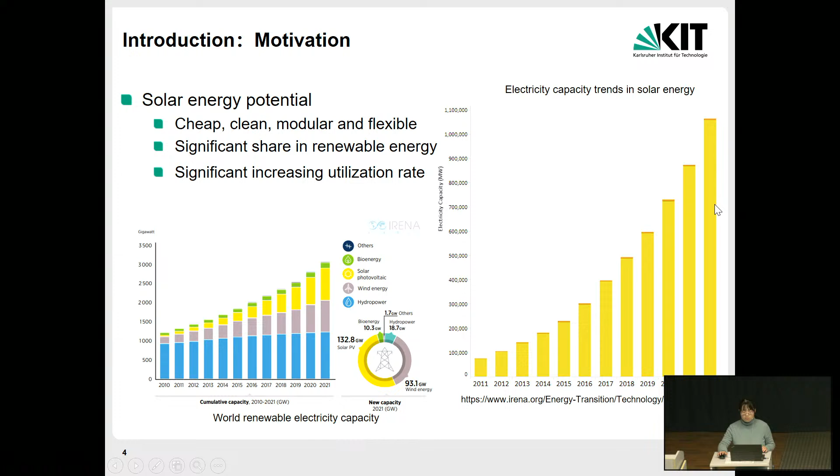It also shows a significant increasing utilization rate of solar energy. As you can see here, from 2011 to 2022, there is more than 10 times the electricity capacity in solar energy.

Regarding combined heating and power systems for domestic application, currently cogeneration, the combined heating and power system, has demonstrated higher efficiency than conventional coal power plants. As you can already tell from the name, it can produce heating and power at the same time. As you can see here, this is the cogeneration system, where the input is natural gas, and it can produce heating and power simultaneously.

Because this one, they will save some waste heat or utilize the waste heat for cooling. So the efficiency would be very high, about around 87%, with very small energy loss.

But compared with the conventional heat and power supply, we just have power or energy generation from coal-fired plants. But many of the energy from these coal plants will be wasted as waste heat, which is not utilized anymore. So the efficiency of these coal-fired plants is very low.

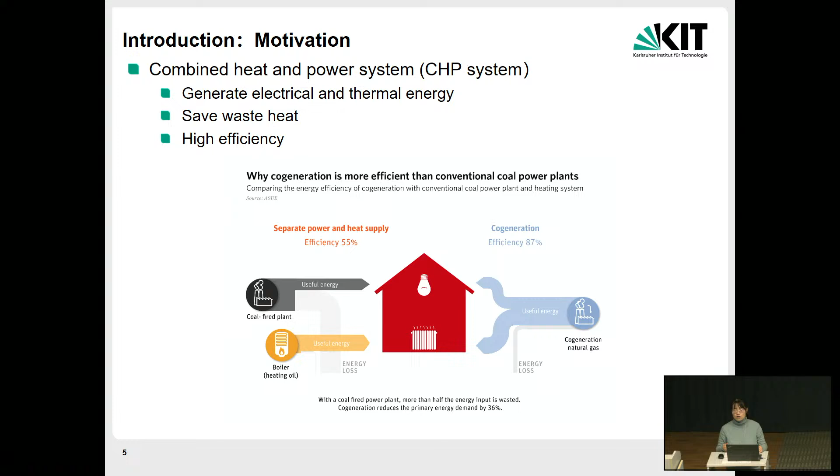The objective of this presentation: first we will establish a very general solar CHP system. Then we will use this system to analyze domestic application in 26 European countries. After we get the result, we are going to do cross comparison from the techno-economic analysis. Finally, from this result, we will determine the future strategy for solar systems.

Here is a very brief introduction of the whole work. The subjects are 26 European countries and 3 solar systems, including PV system, PV thermal system which we call PVT, and also solar thermal system which we call ST. The indicators we are going to investigate are from tech, economic, and environment analysis, and the tools we are going to develop are a MATLAB model to compare this assessment.

And first, I will start with an introduction of these three kinds of solar systems. Okay, so first is the PV system. Currently there are three types of PV system connections with or without grid. One is grid direct.

So one is the grid direct. For this one, the grid will make up for the shortage, and also when there is excess power generation from the PV, it will export to the grid. This can also earn some money, it can be sold to the grid. So in our investigation, we are focused on this grid direct system.

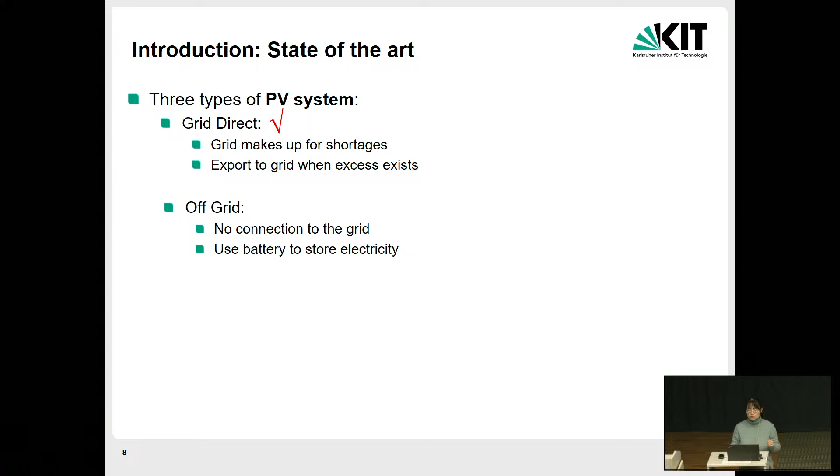Another connection is off-grid, so there's totally no connection to the grid, and in these cases we are going to use batteries to store electricity. The third one, the very smart and also novel one, is the grid hybrid. Here you can see we have the battery as a backup, and then we have the grid, and we can switch on and switch off to connect with or without this grid.

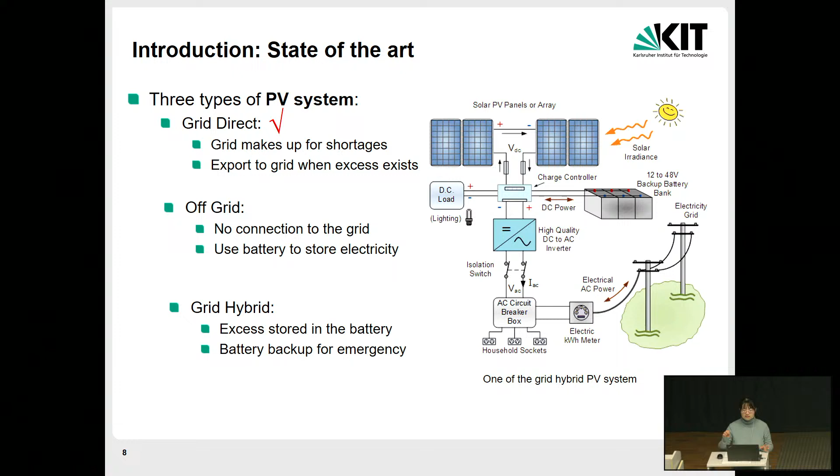This one is very smart, so we can avoid very high energy demand, and then we can use the batteries to charge the system. But also if there's excess energy produced by PV, it can be also stored in the battery. So this is very flexible and very smart, and can adapt to the high prices of the electricity demand.

So if we use a very large area of PV, this amount of reduction of electricity power would be a lot. So there will be one good solution: we can add an additional cooling system to utilize and give away this heat. So on one side this waste heat will be utilized, and the temperature of the PV will be decreased. This is the concept of the PVT.

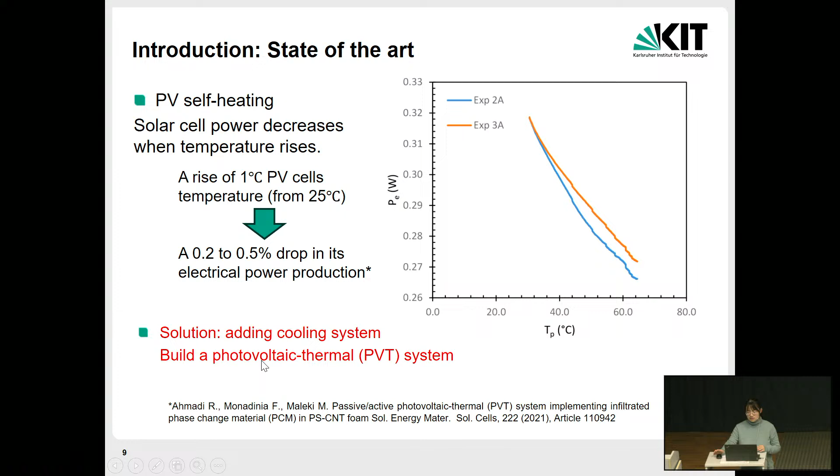We call it photovoltaic-thermal system, PVT. So this is the PV panel, which is just the normal PV panel, and below this PV panel we add some loops, called the cooling loops. For this one, we can take the heat generated from the PV out for heating demand. So this is the utilization of waste heat.

At the same time, the temperature of the PV will be decreased because this waste heat has been taken out, so the efficiency of the PV will increase. For this PVT system, it will produce both electricity and heating.

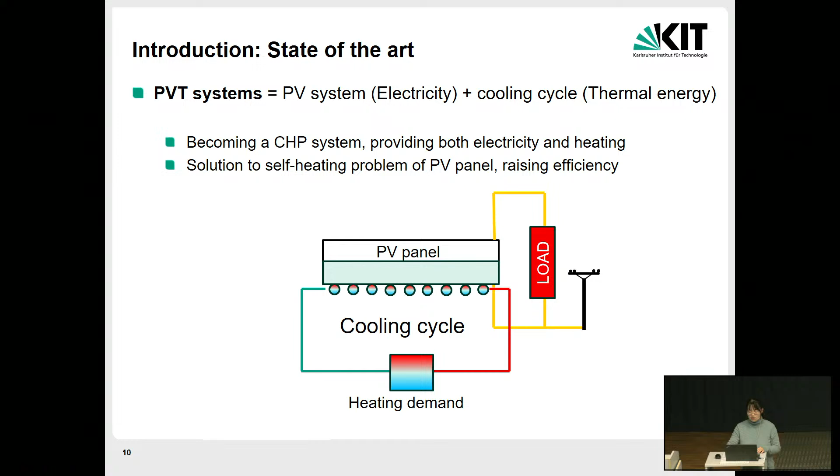The electricity is produced by PV, and the heating will be provided by this cooling cycle. So this is the second solar system we're going to explore. And the third system, maybe most of you already know, is a solar thermal system.

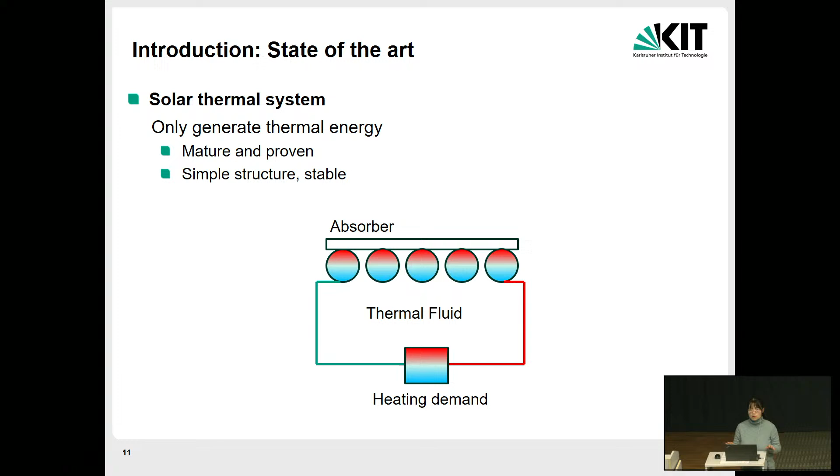It's a very mature and very well established technology. Here we have the absorber and also some tubes, and in each tube we have the thermal fluid to give some heat transfer. The thermal energy generated by solar will go to meet the heating demand of the domestic application. The advantage of this technology is its very simple structure, very stable, and very well developed and mature technology.

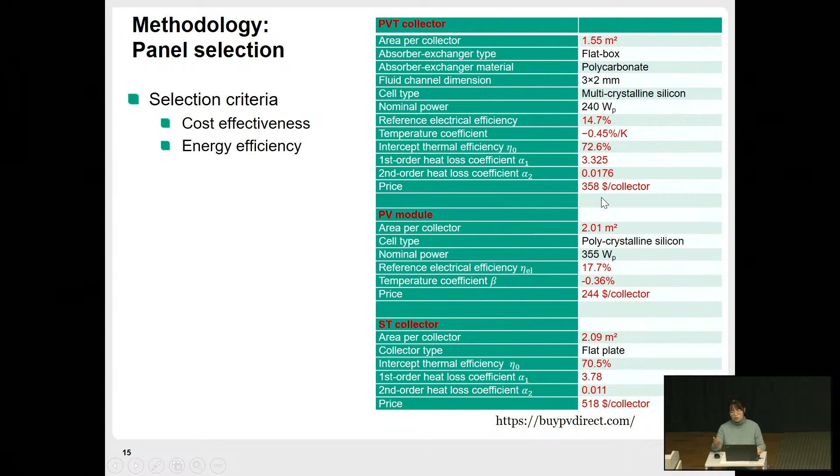Next, this is the water storage tank. So we have some energy balance equations here. This equation shows how much power is generated and how much energy changes in the thermal tank.

We have 4 resources. One is the thermal energy given or generated from the coil, which is connected to the solar panel. We also have losses because of heat loss to the environment, and we need to use some of the heat to meet the hot water demand, and some of the heat to meet the space heating demand.

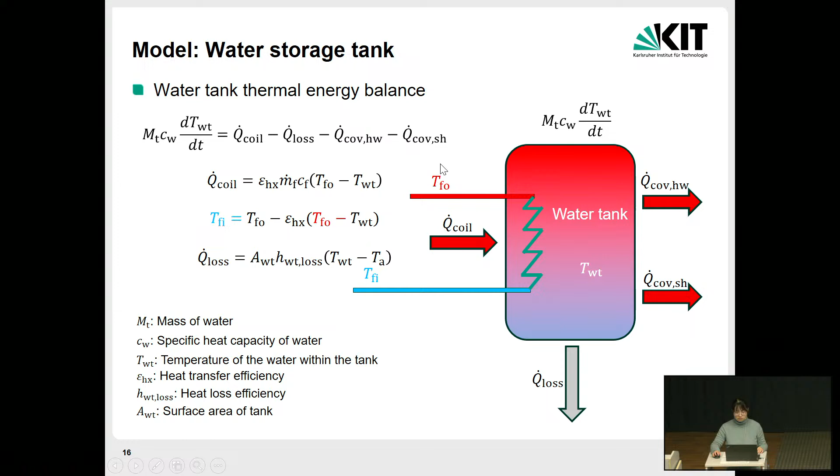So this is the equation of this water tank, and for the thermal demand balance, we also need to think about the current hot water demand. This needs to be judged by the temperature of the tank.

If the temperature of the tank is larger than the required hot water demand, all of the required demand from hot water can be recovered from this water tank. But if this water tank temperature is smaller than the main water supply, none of this will be covered by the water tank. And if the temperature is in between, there will be a linear, proportional relationship between these two parameters.

And this is also the same with the space heating demand. How much of the space heating will be covered from the water tank will depend on the temperature of the water tank.

If the temperature of the water tank is larger than the space heating demand temperature—in most cases, for the thermostat application this is 70 Celsius—if the hot water tank is larger than 70 Celsius, all of the required space heating demand can be covered. But if it's smaller than the outlet of the radiator, it's 0. And if it's between, there will also be proportional equations.

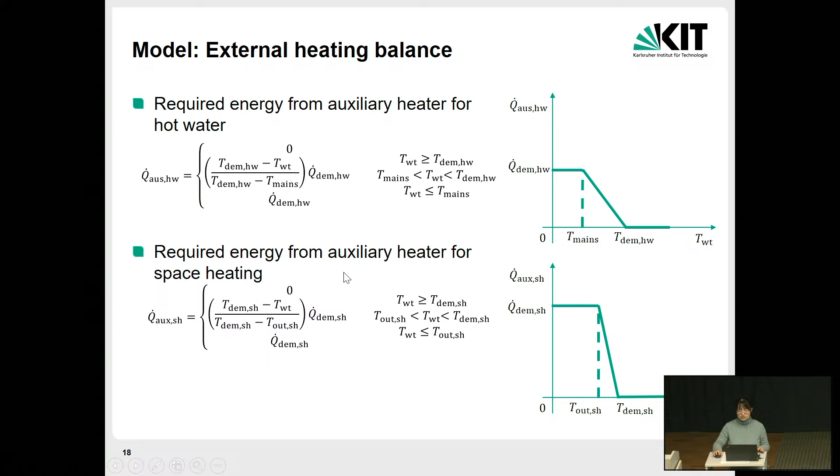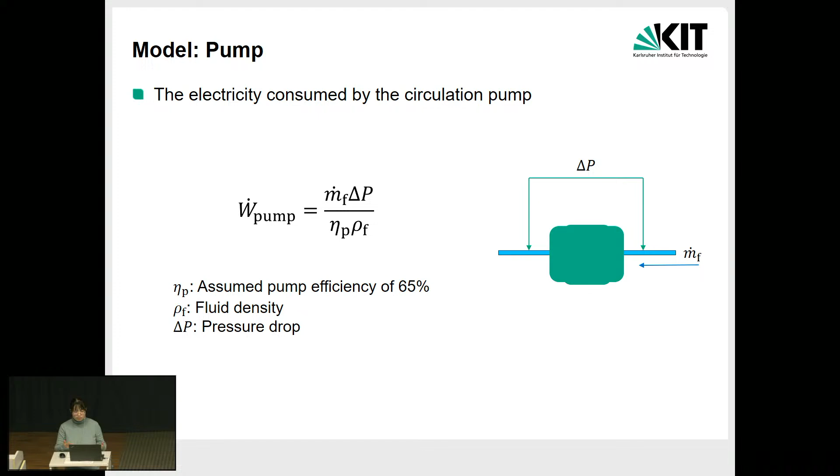And here this is also the required energy from the auxiliary heater—this is for hot water, and this is for space heating. And we also have the pump, the electricity consumed by the pump from this equation.

This is because in this model we calculate annually, conducting this calculation for 1 year, which is around 8,760 or 8,784 hours. So there's a lot of data, but we calculated this from 1 hour to 1 hour. So here I present 1 hour cycle so you can understand it better.

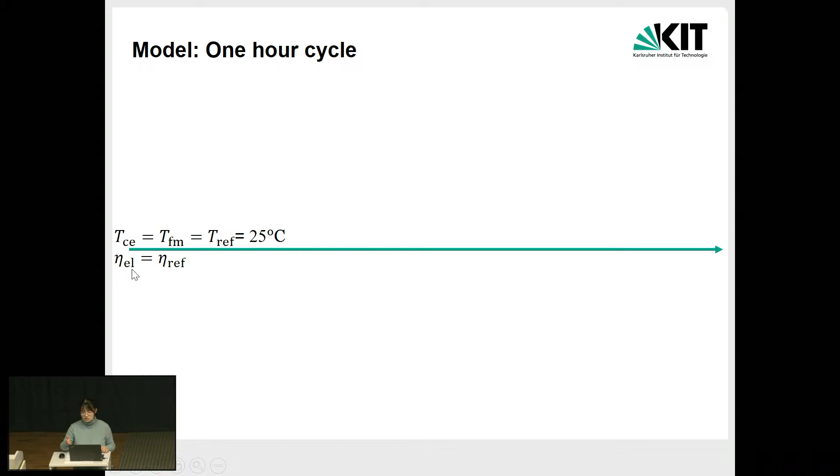So here at the first point, this is the cell temperature and the efficiency of the solar cell. We just use the reference temperature and reference efficiency. When the sunlight comes in during this 1 hour, the temperature of the cells increases and the electricity efficiency decreases. Then from the solar irradiance in this 1 hour and this efficiency, we calculate the electricity generated.

This electricity is going to meet the electricity demand, so first we calculate this electricity part. Then after that, we can calculate the reduced temperature, and from this reduced temperature we can calculate the thermal efficiency of this system at this specific hour.

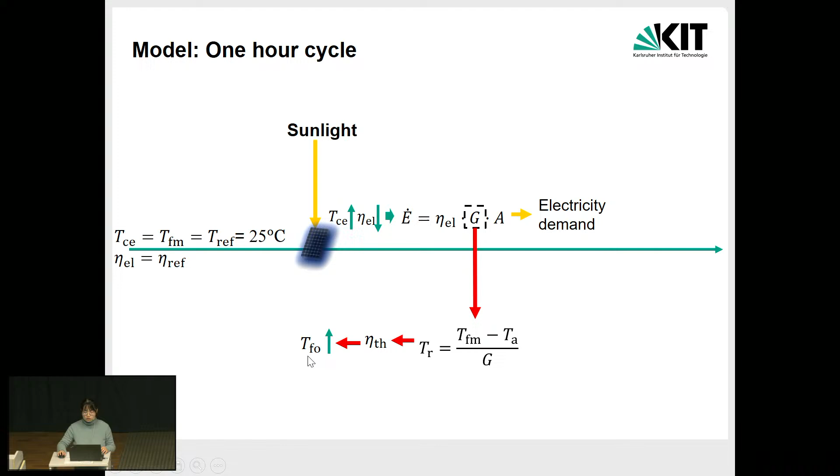And then we can calculate the output, the outlet fluid temperature. And after the coil, we can calculate the water tank temperature. And here, after we know this water tank temperature, we can define how much heating thermal energy we can recover, or we can cover from this solar system. And after that, we can calculate the fluid inlet of this panel, and then this one cycle is complete, and then we can calculate the next cycle.

So this is for one cycle, and then for each case, we have calculated more than 8,000 times, because the target is for 1 year long. So this is 1 hour.

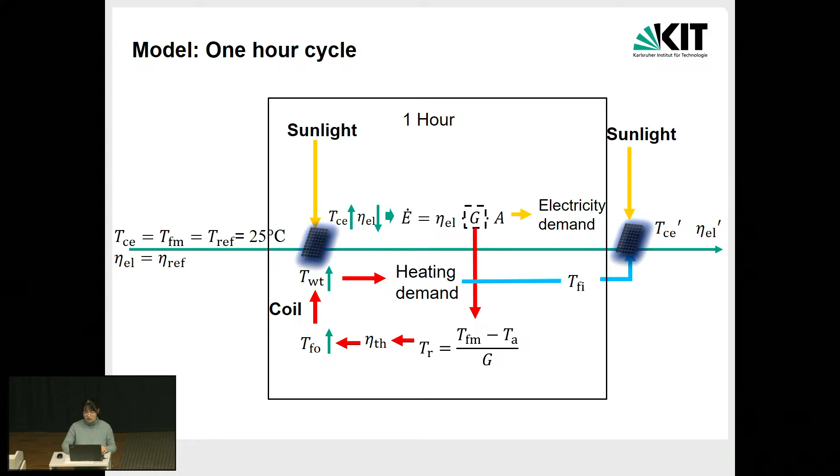And here, this is the model validation. We've validated the PVT panel. So this is the model simulation, and this is some experiment data. This experiment data we get from the company, the product company. And the deviations are okay, it's quite fine, around 5%.

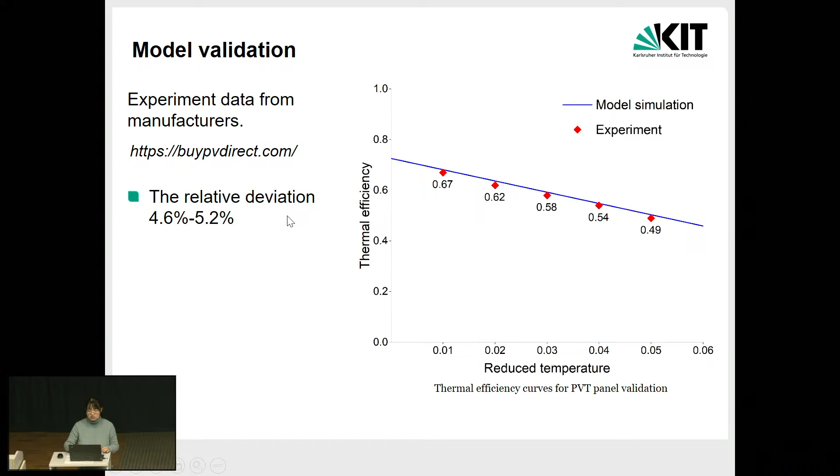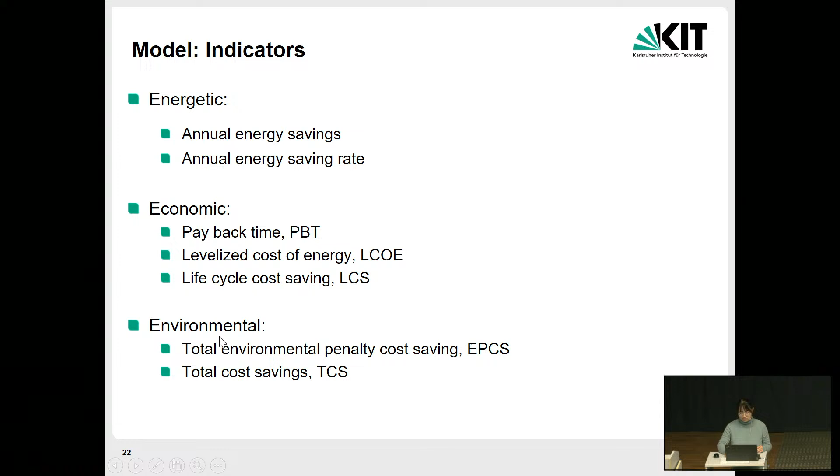So we investigate annual energy saving, meaning how much energy we can save from this if we use this solar energy. And another one is the annual energy coverage ratio.

This means the ratio of how much energy we are saving to how much demand we need for the domestic application. So if this ratio is 100%, all of the required demand for this domestic application can be met. But if it is 0, which is the extreme limit, none of the energy will be covered from this solar energy. So this is also very important for us to understand how much energy can be covered from this solar panel, to show the potential of the energy coverage performance.

And another indicator is the economic indicator. So one is the payback time. If this payback time is very small, then it is really good, because you don't need a very long time to earn some money.

And then the lifetime of the technologies is 25 years. So that means if the payback time is larger than 25 years, this investment is not good, so we don't need to buy this product.

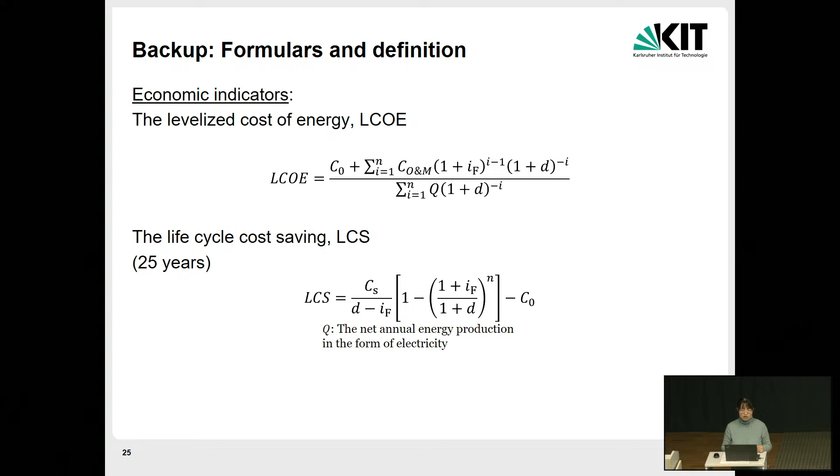Besides the economic indicators, we also think about the potential of this technology from an environmental perspective. Here we have the total environmental penalty cost saving. This means if we use this technology, how much CO2 emissions we will save, and these CO2 emissions will have a converted cost related only to the CO2 emission. We calculate how much CO2 we can save and how much money we can earn from this CO2 reduction.

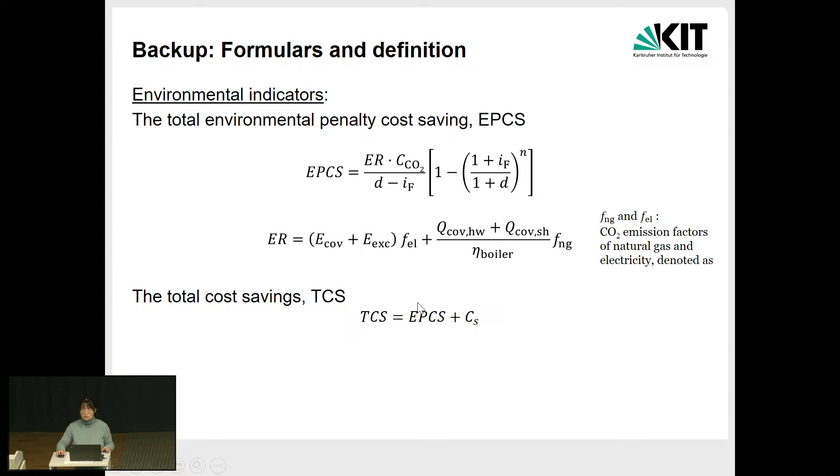Next, I will quickly go through the input parameters. Now that we've established very general models, for these 26 European countries we need to collect all the input data, because for each country the input data are quite different. First is the solar irradiance.

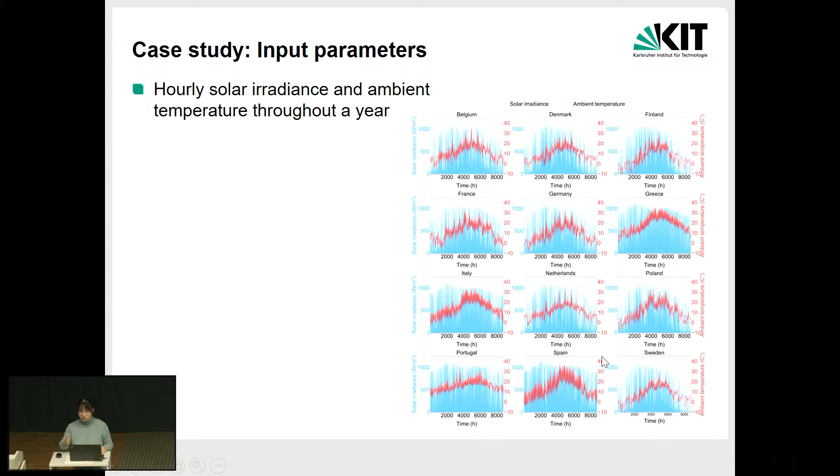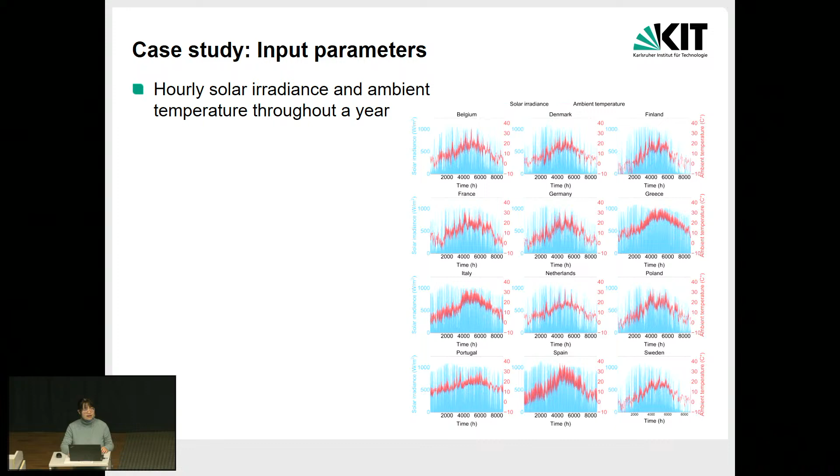This blue line is the hourly data of solar irradiance, and this red line is the hourly ambient temperature. Here I give the example of Germany, and this is the example of 12 countries showing the solar irradiance in the transient case. In our model, we have collected such figures for 26 countries.

The next parameter is the hourly electricity demand throughout the year, because we need to understand the electricity demand from domestic applications. Here is the annual electricity demand from each of the 26 countries, and here is the transient, hourly dependent electricity demand throughout the 1 year.

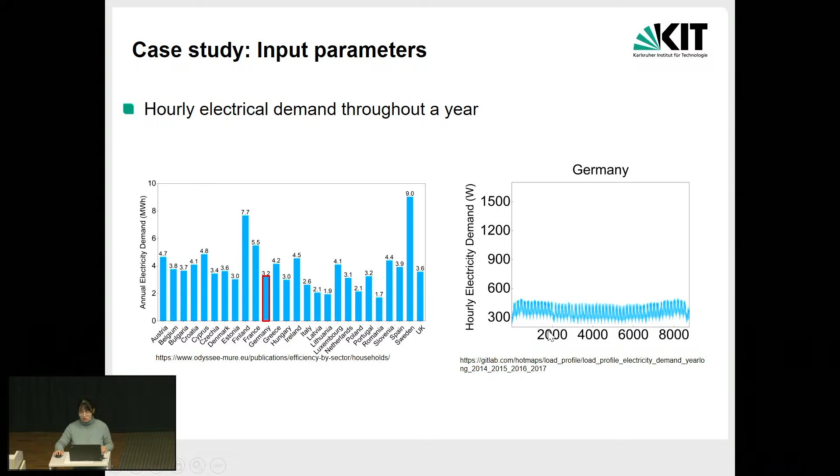This is also the example of Germany, and here we have examples of 12 countries. This is very interesting - you can see that Finland requires a lot of electricity demand, maybe because it's always dark there, or they need more electricity. Sweden also needs a lot of electricity. In Poland, since these y-axes are the same, you can see they need very little electricity demand compared with Finland and Sweden. Germany is also okay, not too much compared with Finland and Sweden. This is interesting to know the different electricity demand from these different countries.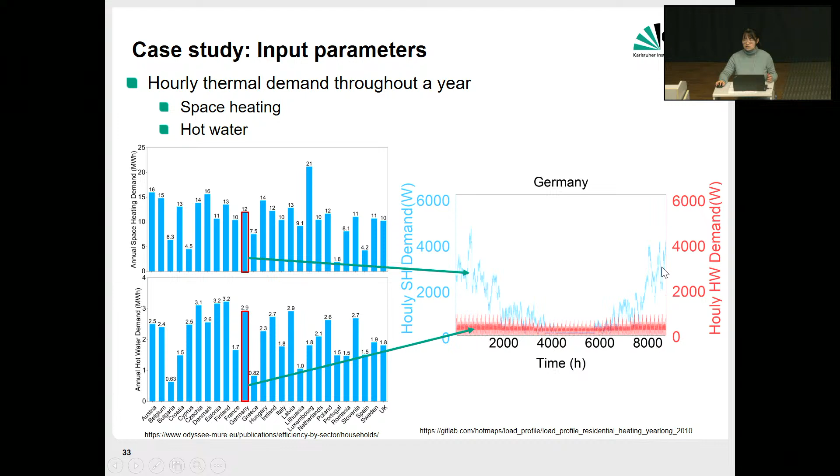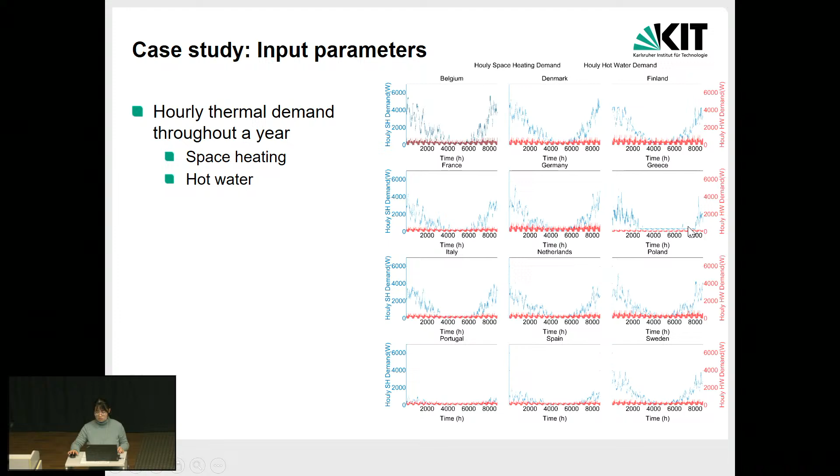And in Greece, as you can see here, the time that doesn't require space heating is very long—almost, I think, longer than 5 months. So this is the difference in thermal demand through the year.

And here we also think about some input parameters of roof areas, because we need to define how much solar panels we are going to install on the rooftop.

So we need to think about how much solar panel area we need for each country. We assume that the installation area of solar panels is fixed at half of the roof area. We have the average roof areas of each country, and then we take half of it for solar panel areas.

Another parameter we are thinking about is inflation rate and discount rate, because we need to think about the price after 25 years—how this money changes over these long times. So we need to think about inflation rate and discount rate.

So here we collect the data of inflation rate, and also discount rate. And we also need to think about energy price for each country—the electricity price of these 26 countries, and also natural gas price. One is for electricity, and another is for heating from burning natural gas.

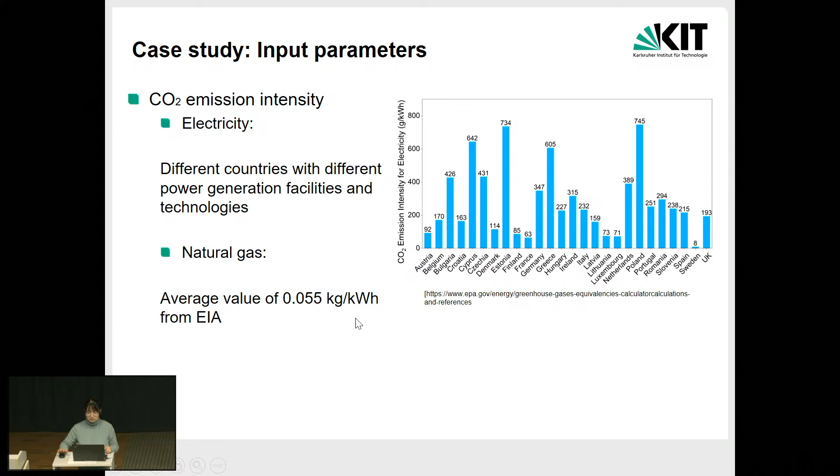Okay, so now we have the model, and we have all the input data verified from the 26 countries. Now we are going to put this data into the model and do the simulation, and then the cross comparison. So next we'll discuss the results.

Okay, so first is the transient operation of 3 typical countries. Because we now have results for 26 countries, there's a lot of data, so first we start with 3 countries which are very typical. We choose Sweden, Germany, and Spain as the 3 typical countries for comparison first.

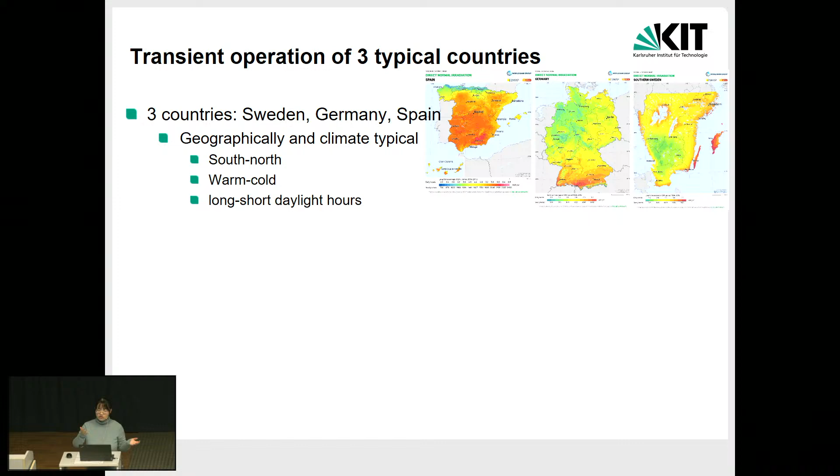The reason we chose these 3 countries is because first, they are distributed from south to north, from very warm climate to cold climate. Also, Sweden has very short daylight, and Spain has very long daylight, and these 3 countries are among the top 10 solar energy markets. So it's very interesting to investigate the potential of solar energy in these 3 countries.

And for comparison, we also choose 2 typical weeks: one is the week starting from January 1st, and the other is the week starting from July 1st. We want to understand the transient operation between these 2 typical weeks—one winter, one summer.

Okay, so first is the comparison of 2 typical weeks. Here we choose the PV panel, and we choose Germany, and here this is the result for the winter, and this is the result in the summer.

As you can see, this light gray is the demand required during this time, and this red one is how much electricity is excess from this solar panel. This dark one shows how much electricity can be covered from this system. In the winter, there's almost no excess because the demand cannot be met, there's no excess from the PV panel since solar irradiance is very low.

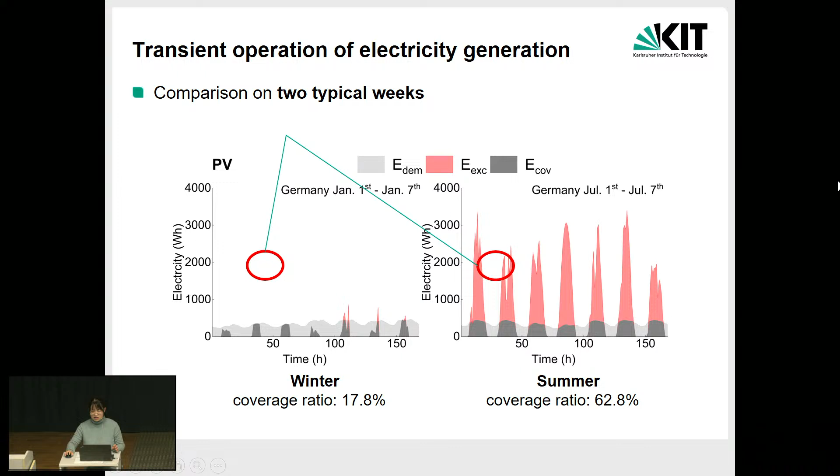electricity than PVT. Then we compared three typical countries: here we have cases in Spain, cases in Germany, and cases in Sweden. We chose a winter week for the comparison, and the solar panel we chose is a PVT panel.

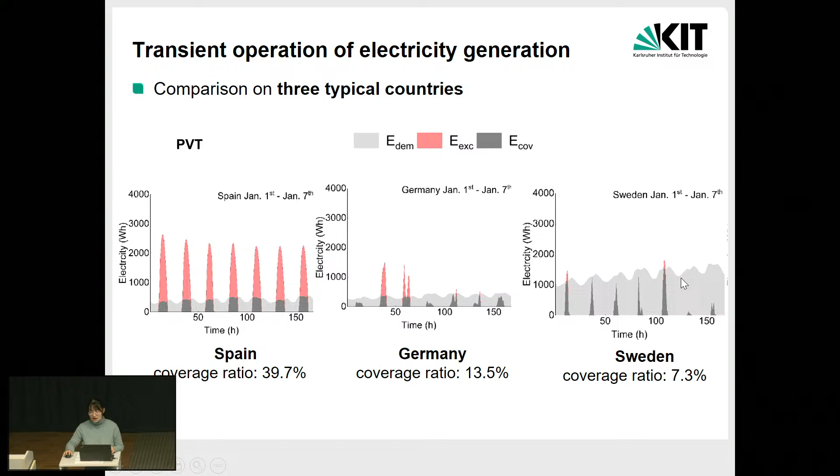So here I give the number of the coverage ratio for Spain during this winter: it can achieve 40%, which is really good because this is winter. In Germany, only 13.5%, and for Sweden, it's only 7.3%. I think this is because of the low solar irradiance, the generated electricity is not too much, and also the demand is really high, so the total ratio is really low.

Previously we discussed electricity generation, and next we're going to discuss thermal energy generation.

So here is the comparison of two typical solar systems, one PVT and one ST, for thermal energy. This one is the demand, how much we demand for Sweden, this dark gray is how much we can cover from the PVT, and this is how much is covered from ST. From these two pictures, we can show that the potential coverage for both PVT and ST are quite similar, all below 10%.

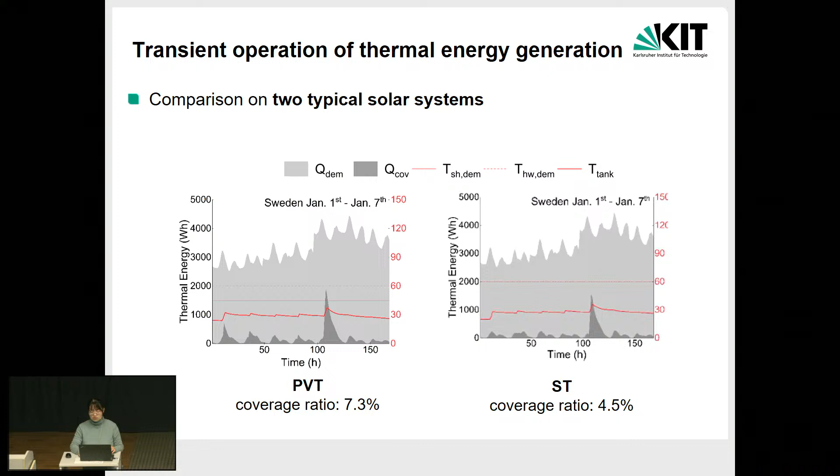This shows that in winter there's not much potential to use these two solar systems to meet the thermal energy demand in domestic applications.

We also compare with two typical weeks. We focus on PVT, based on Sweden, one in winter time and another in summer time, to show the significant difference between these two typical weeks. In winter, for PVT, the thermal energy coverage ratio is below 10%, which we discussed in the last slide. But in summer, the coverage ratio is almost 98%, which is really good, meaning almost all the thermal energy demand can be covered for PVT.

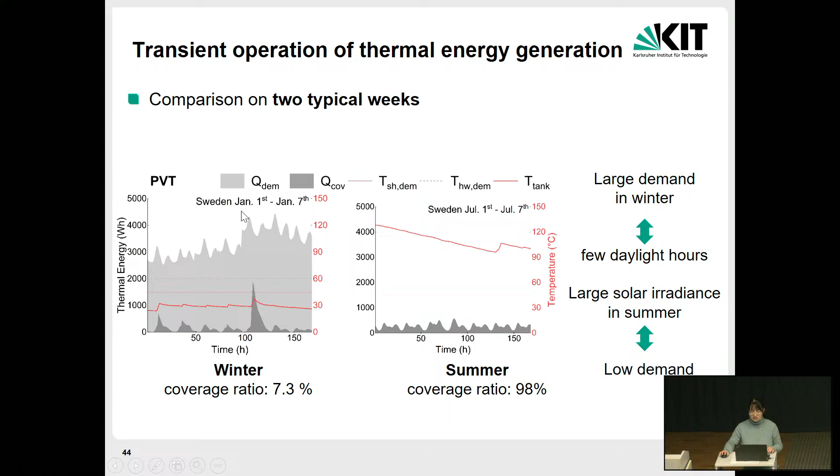We also compare different typical countries on PVT: Spain, Germany, and Sweden. Because in the last slide we found that in winter the coverage ratio for Sweden is really low, we wanted to see how the case looks for Spain in winter. We find that for Spain, the potential of using PVT is really good, as you can see with the demand and coverage. So even in winter, if we use PVT in Spain, the coverage ratio can reach 92%.

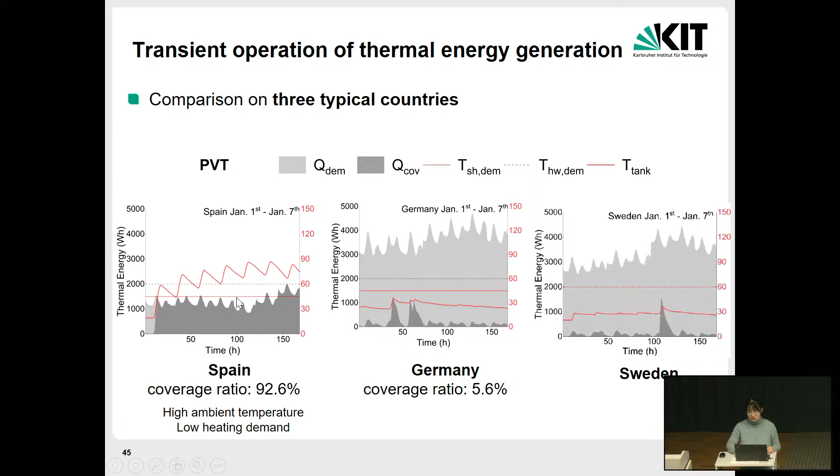One reason is that Spain has a very low heating demand. As you can see, the heating demand compared to Germany is a lot, and Sweden is a lot, but Spain has very low heating demand because of the high ambient temperature, and also the solar radiance of Spain is high. So if we use PVT in Spain, there's a very high potential for a high coverage ratio. In Germany and Sweden it's also below 10%.

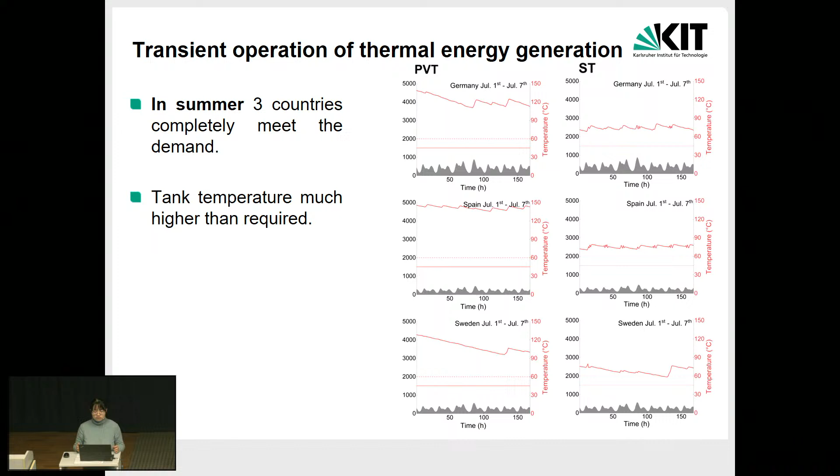We also considered the other case, in summer. We compared PVT and ST for the German, Spain, and Sweden cases, looking at how much thermal energy can be covered in summer for these two systems. As you can see, almost all the thermal energy can be covered. So if we use this solar energy in summer in these three countries, it's quite good - we don't need any external or additional heaters. Almost all of the demand can be covered just using PVT or ST, without needing electricity heaters, heat pumps, or other things.

So this is the transient operation. We compare three countries and look at some monthly results for these three countries - how much electricity we can cover from January through December. Here the gray bar is the demand for each month, and this blue curve shows how much we can cover from PV or from PVT.

This red one is how much excess we can get from the solar panel. The upper figure is the PV, and the bottom figure is PVT. Here we have Germany, Spain, and Sweden. Let's start first with the countries since there's a lot of data.

When we compare different countries, we can see that Sweden, whether using PV or PVT, has a much lower coverage ratio compared to the others. Especially in Spain (ES), almost all the demand can be covered, and we also have some excess. But for Sweden, as you can see in these different bars, especially in winter, the coverage ratio is very low.

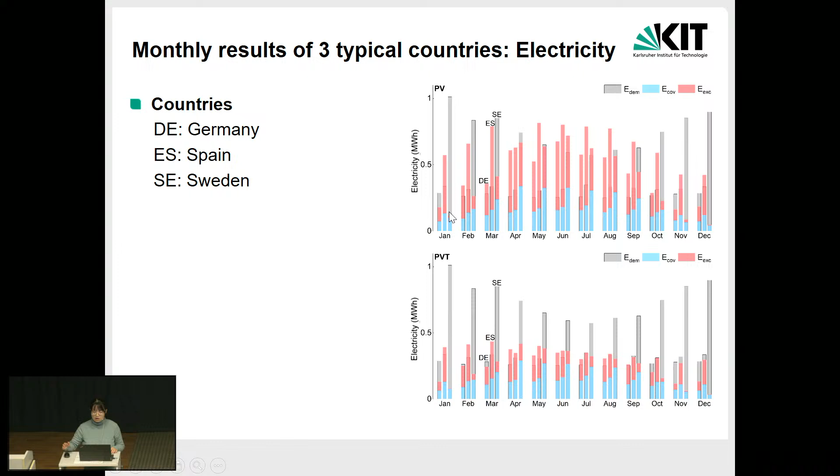We also compare PV and PVT. From first view, we can see that in summer, almost all of the energy can be covered from the PV. But for PVT, especially for Sweden, not all of it can be covered. Also the coverage ratio from PV is higher than PVT in the winter.

And also from the months, from January to December, it shows a very conflicting trend. For example, this is the demand trend. For electricity, in the winter we need a lot of electricity, but in the summer we need less. So this is a trend that looks like this.

But the electricity generated from solar energy, the trend is like this. So in the winter we cannot produce a lot of electricity, but during the summer we can produce more. So this trend shows that it's not quite good to meet the demand, because actually in the summer we need less, but in the winter we need too much electricity.

So this means that in the winter we need to think about other technologies to meet renewable energy needs, not only solar, maybe other things. We need to cover the huge difference between this demand and the electricity that can be provided from the solar panel.

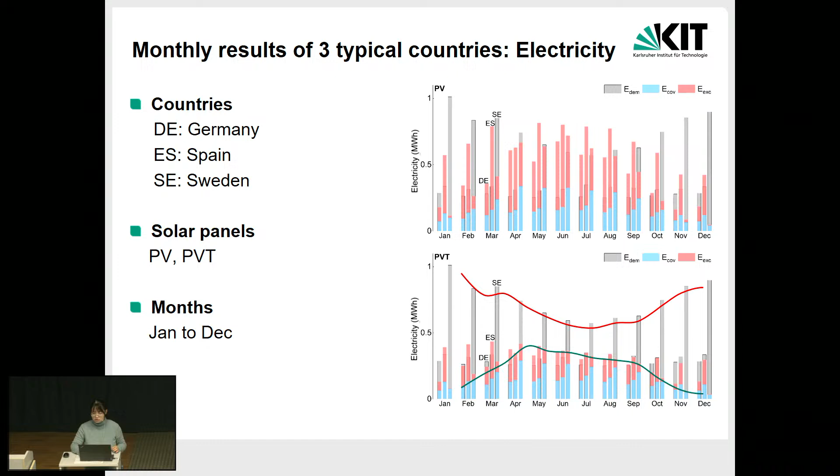And next is the thermal energy. So here, how much thermal energy we can cover from PVT, and how much solar energy we can cover from ST. When comparing these two things, PVT and solar thermal are quite close - the coverage is quite close between each year.

But when you compare with different countries, as you can see here for ES, which is Spain, almost all the thermal energy can be covered, except December. In other months, almost all the thermal energy can be covered in Spain.

But in Germany and Sweden, especially for Sweden in the winter, the coverage is very small, as you can see here. So we need another strategy, maybe some heat pump for Sweden. The solar panel is not enough.

Also for different months, as you can see here for Sweden, it's only 4% coverage in December. This is because of the shorter daylight and also very huge demand, as you can see - very huge demand, but also very little electricity produced.

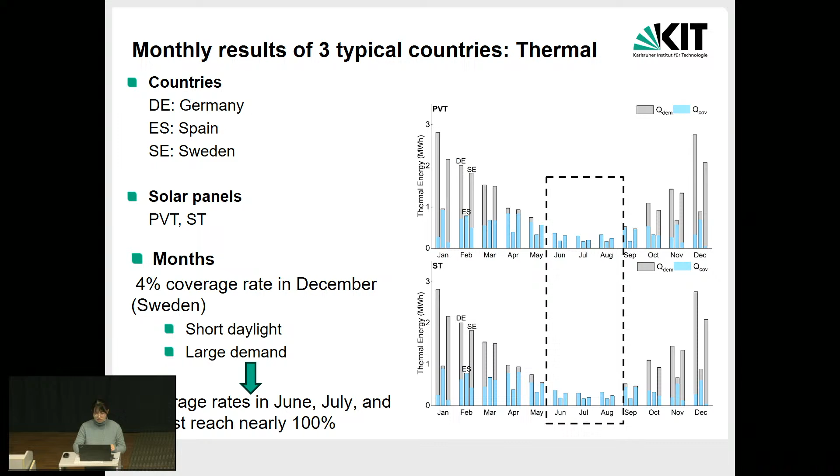And so here is the result of the annual result - how much electricity can be produced for a year. This annual result we are going to compare across 26 countries. This is for the PV system.

As with this, the dark gray bar is the demand, and the blue is the coverage - how much energy can be covered, and how much electricity can be accessed and sent to the grid. There are 26 EU countries, and we can see here that Finland has the lowest electricity coverage rate.

Yes, Finland has the lowest electricity coverage rate, which is only 27%, and Italy has the highest electricity coverage rate at 49%. The average electricity coverage for this PV system across these 26 EU countries is at this level, which is really good - meaning that for the general 26 EU countries, this PV system can cover almost 40% of the electricity. So then we need to think about how to deal with the rest, the 60%. But this is quite good because almost half of the electricity demand can be covered by the PV system.

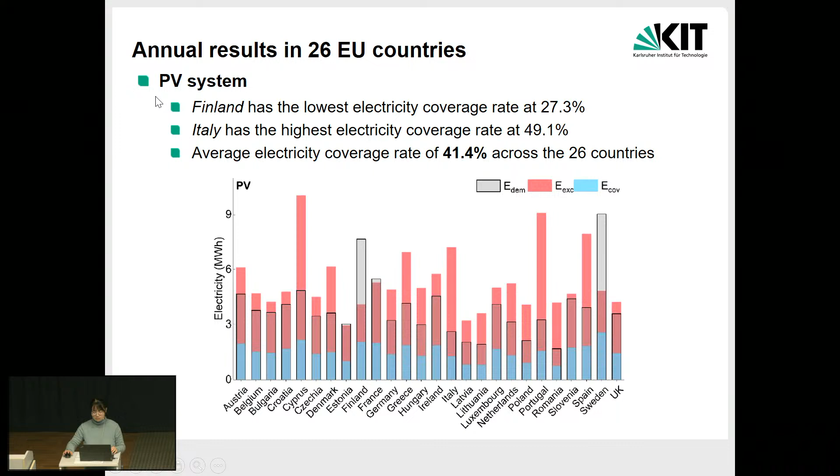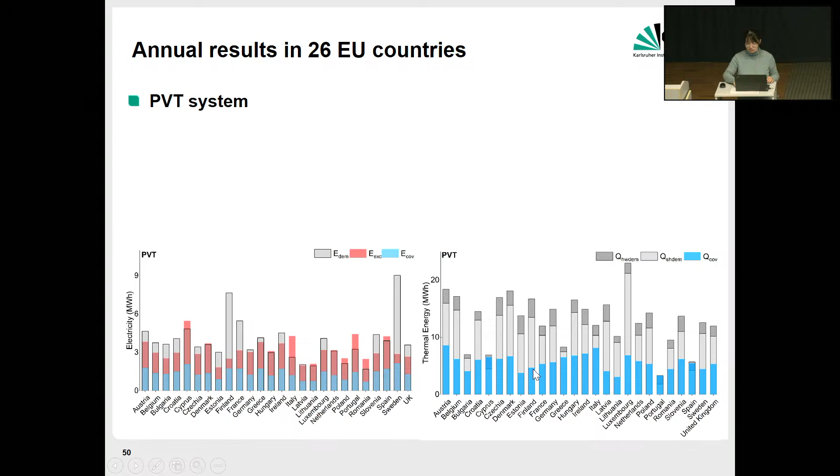And next is the annual result of the PVT system - how much electricity can be covered from the PVT system, and how much thermal energy can be covered from the PVT system. So here, first we think about the electricity.

We can select the top 3 EU countries which have the highest electricity coverage ratio. One is Cyprus, where PVT can cover almost 93% of the required electricity, and Portugal almost 99%, which is really good - we don't need anything else, only 1% from the electricity heater. Spain is also very good, showing very promising potential using this PVT system for electricity.

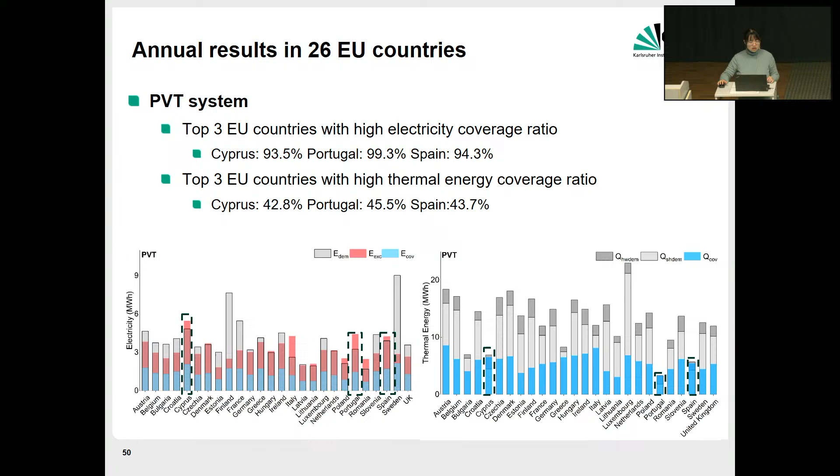So that means compared to this 90%, this is low. This means that if we use PVT, we still need to think about others to cover the other 60%, because this is the best case. In the worst case, maybe sometimes below 10%. So this PVT cannot cover all the thermal demand - we need to think about a heat pump or just a gas boiler or something.

So this is okay, just following this figure. Here we also find the lowest heating demand - one is Latvia, Lithuania, and Luxembourg, which have very low heating demand, but I mean the lowest thermal coverage. But for electricity, they show quite good results - high energy coverage around 37%, which is above the average.

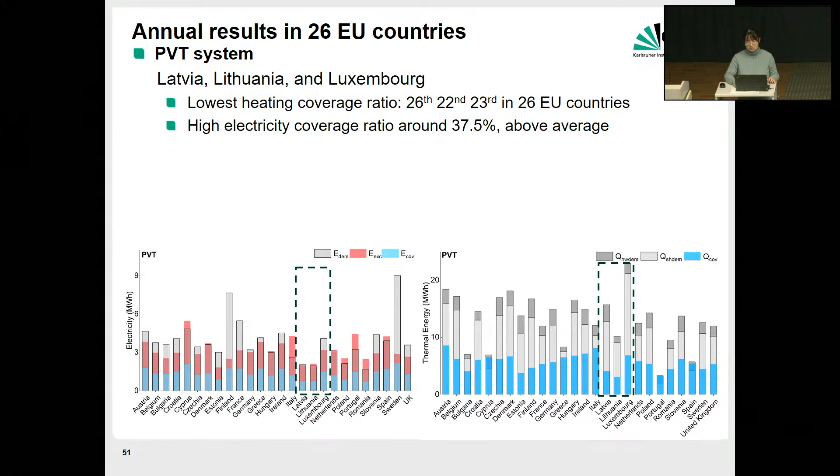So the next is about the ST system. We can check that Portugal has the very highest coverage, around 97%, and Luxembourg has the lowest solar thermal energy coverage, around 49%. The other countries are in between.

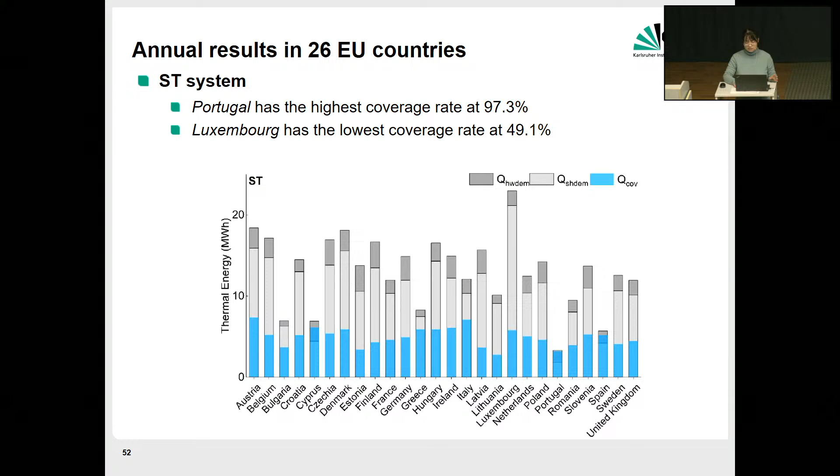Here is the comparison analysis between 26 EU countries, thinking about payback time and total cost savings. Let's first start with payback time. We have this map of the EU countries, comparing PV, PVT, and ST.

If this color is getting more dark, that means the payback time is more. As you can see, it's very obvious that the ST system has a lot of dark red, showing that payback time for ST is really not good. The longest one is around 120 years in some countries, which is not promising, showing that in some countries using ST is not that cost effective.

Here I give some average payback time among all 26 EU countries. The PV is around 9.3 years average payback time, which is good. For the PVT it's 22.3 years, which is also within the lifetime, but for the ST it's not good. Maybe ST is promising for use in some countries with high solar irradiance and small thermal energy demand, but for most countries it's not quite good.

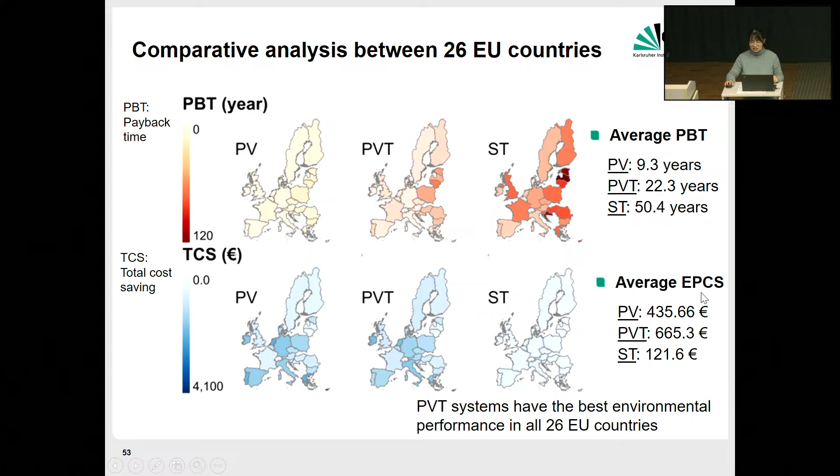So maybe we can give some conclusions. First, the PV system has the better economic performance because of the very low payback time. But the PVT has the best environmental potential because it has a very high EPCS, environmental potential cost saving, due to the reduction of CO2 emission.

We also think about the levelized cost of energy and the life cycle cost saving. For the average levelized cost, PV is only 0.079 euros per kilowatt hour, and PVT is much larger, and ST is larger still. We can compare this with the electricity price of different countries. If this value is lower than PVT or PV, it's better - we can just use PV instead of electricity from the grid.

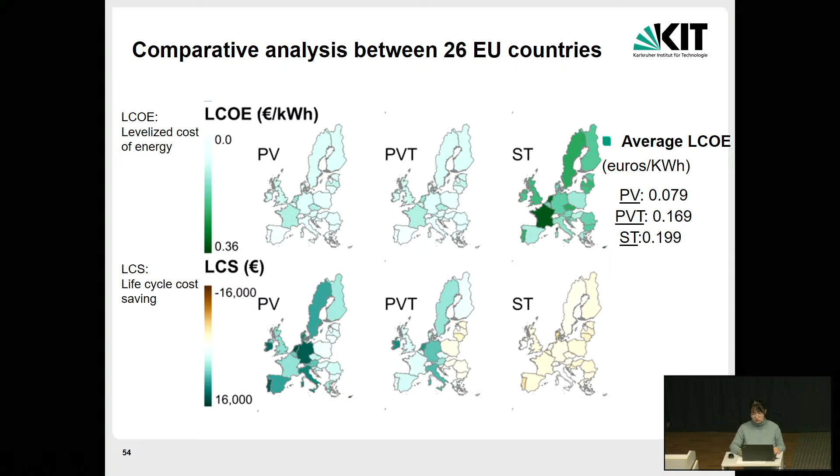We can also show this. For the levelized cost, it has a very similar trend to the previous economic parameters. But one case is that for the life cycle cost saving, it's very related to location. For this north part, there's not much cost saving, especially in this area, but in the more south direction, it shows higher potential of cost saving when using this solar system.

Okay, so this is the last part. Besides this, we also think about predictions of the payback time, because the energy price is varied each year. So we are thinking about if the natural gas prices and electricity prices change next year.

What are the optimal strategies for this different solar system? As you can see here, I'll give an example of Poland. We changed the natural gas price and electricity price. This dot is the current price, so currently Poland is at this price. But if we have this natural gas price higher, we can get to this range. This is the optimal solar panel selection.

As you can see, currently we are in the PV range, and PV is the best selection. If we come to this range, PVT is the best selection. And if we come to this range, ST is the best selection.

This means that if the natural gas price increases and we have a very low electricity price, it will be favorable to the ST system. And if we have a very high electricity price, it will be favorable to the PVT system. And if the natural gas price decreases, and the electricity price is higher, it will be favorable to the PV system.

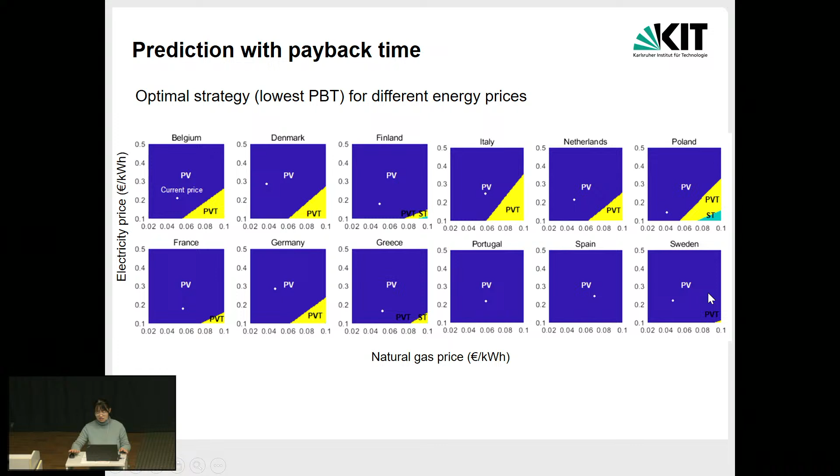But PVT also shows some chance to win when the natural gas price is very large and electricity price is low. For some countries, like Portugal, Spain, and Sweden, PV is almost the biggest winner - as you can see, there are no other sections.

And the PV system has the best economic performance in all the EU countries. Here is the average payback time of the 3 different solar energy systems. We also demonstrate that the PVT system has the best environmental performance among all these countries, because with the environmental percentage cost savings, the PVT wins.

The potential of using these solar systems is also determined by the areas and locations. We found that southern and coastal European countries tend to have better economic performance using these solar systems, because of larger solar irradiance, higher temperature, and milder climate, which means lower thermal energy demand. Here we list 3 typical countries which are very promising for this solar system: Spain, Portugal, and Cyprus.

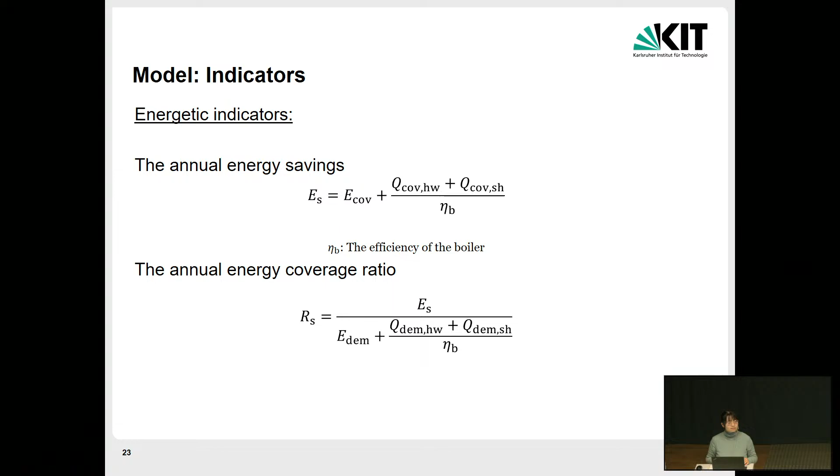One question is whether it's a gas boiler or an electrical boiler. This is a good question. Currently in my study I think about the gas boiler because it's more conventional, but many families now use electricity boilers. Still, the gas boiler is the most common method for providing this energy.

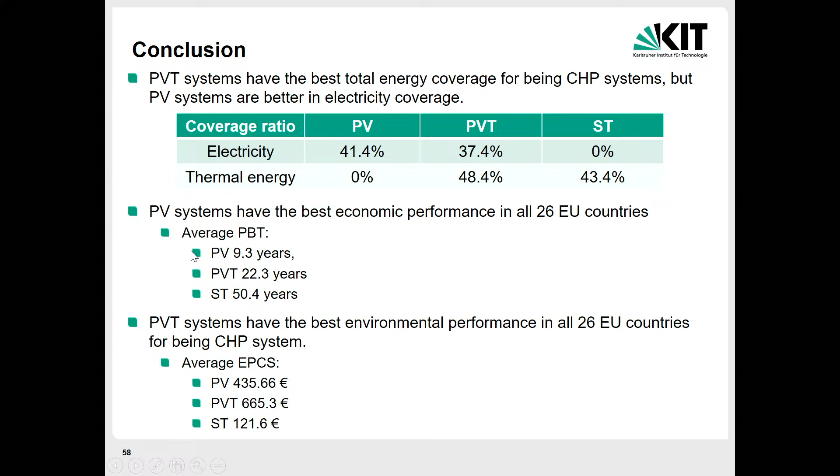In your calculations comparing energy needs per country and the possible received energy from solar panels, what approach did you use to calculate the achievement of the covering? Was it like averaging per household, or did you use some average energy consumption per household, or was it per country? So I showed, you mean this one? You mean the average payback time data? I'm not sure, which data are you asking about?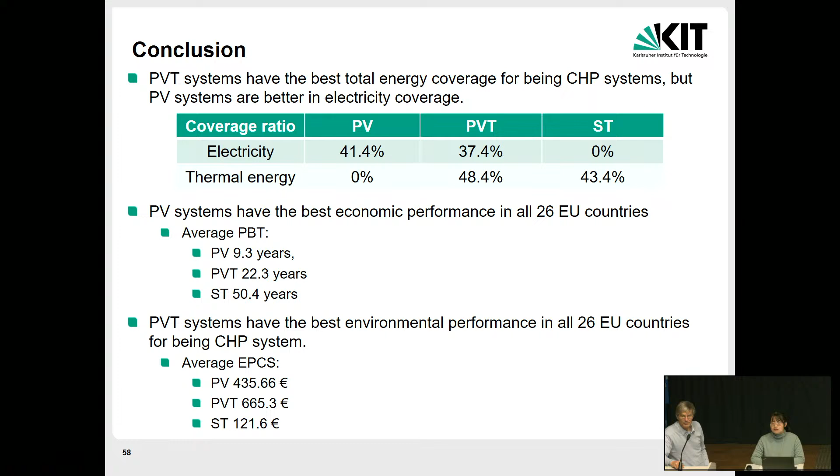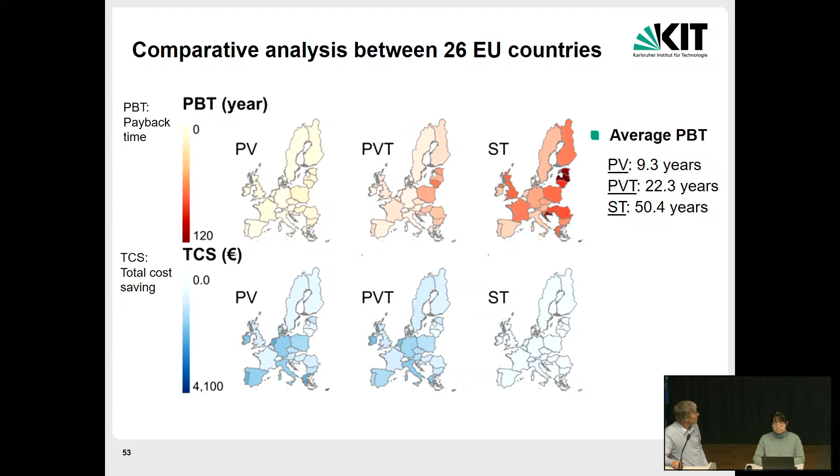There were slides with countries, for example slides on Europe with Germany, Spain, Denmark, or Sweden. Ah, you mean this one? Yes, for example. So I mean, how did you calculate it? What was the approach? Did you take the country consumption, or did you use an average consumption per household, for example?

Ah okay, I understand. I used consumption per country, but for each country I chose the typical thermal demand and electricity demand of domestic applications in that country.

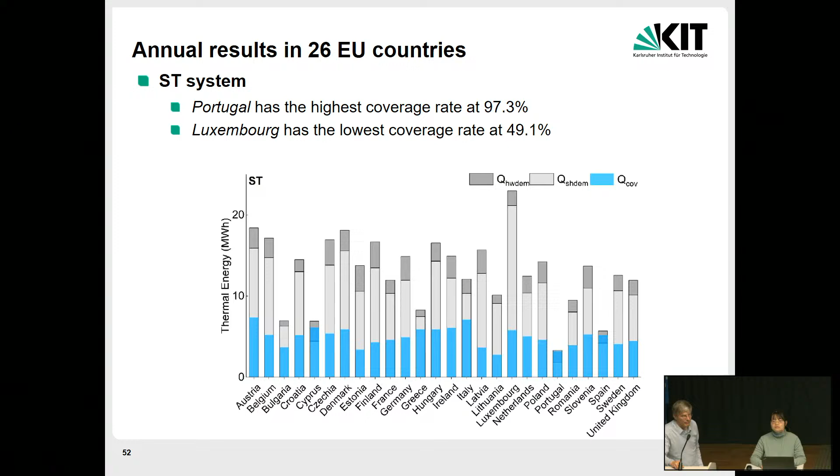So, just an additional question: did you make any assumption about the size of the installation? Is the panel used in all households, or somewhere else? Was this an assumption of using the panels in every house? Yes, in every house, and on the roof, as you can see here.

We got some data, I think from the EU database, annual data on roof areas, and then we calculated 50% of that for the solar panels for different countries.

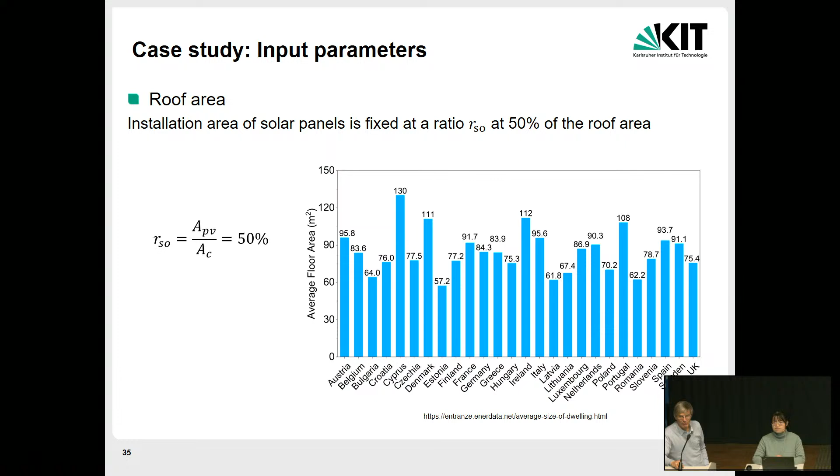Any more questions? Doesn't look like it. Then thank you very much. Okay, thank you.